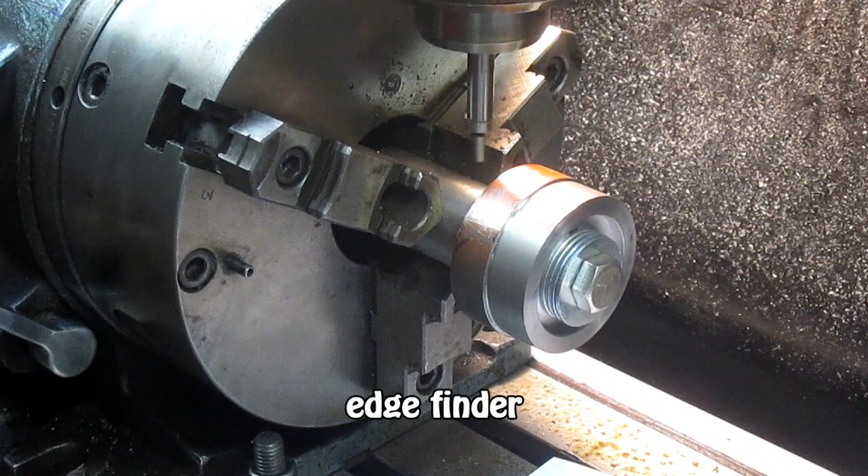Okay, we're going to knock our edge finder off center a little bit. We're going to come down, bring our piece over until we touch, until it kicks. There it is right there.

And then we want to add 100. So let's kick that, and then we're going to add 100. Okay, and that should take us dead center right to that line.

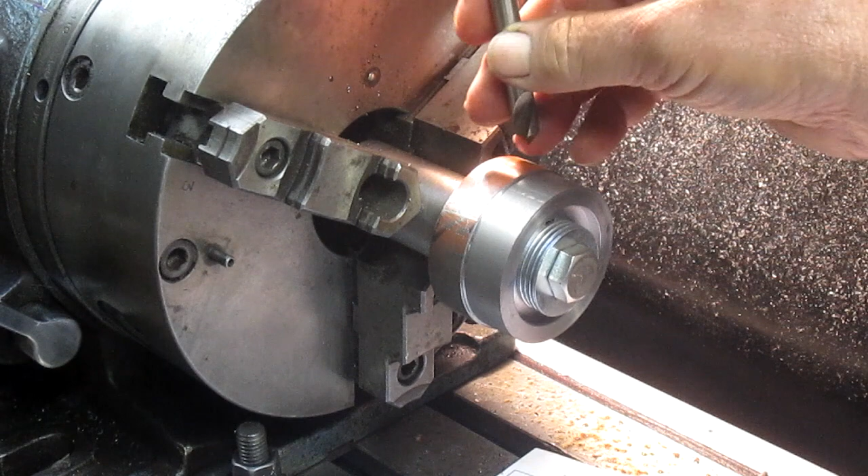How about that? That should give us something. Well, you can't see it, can you? Ha! Okay, let's back up a little bit. There it is. So we're just using a center drill, and all we're doing is checking to see where our line is. And it looks to me like we're dead center.

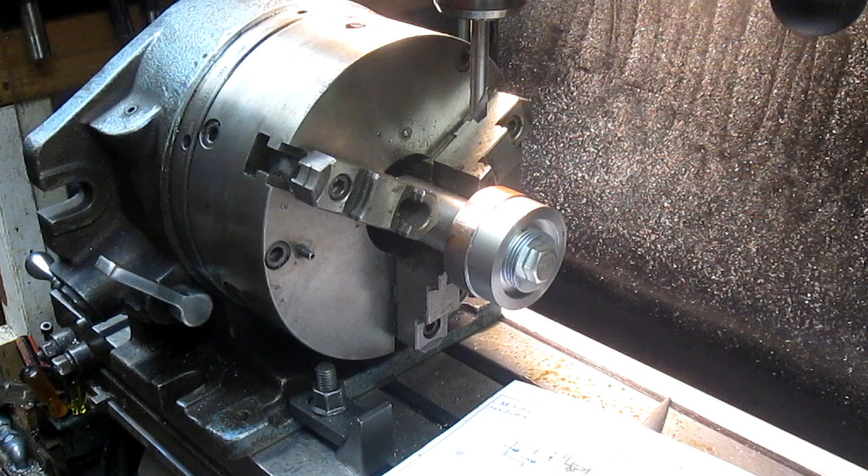Okay, so now we're dead center on this line, so we want to zero that. So now we're going to come one hundred and 1 thousandths. Or is that 1 inch and 100 thousandths? I always forget to do the decimal. So there's 1 inch, 100 thousandths.

And that seems to be landing just about where we want it. Now, are we back in place here? No, we're not. Just want it to go to 330. 330, there it is. Yep, that's hitting just about right. I think we're going to be good. Let me get a little center going.

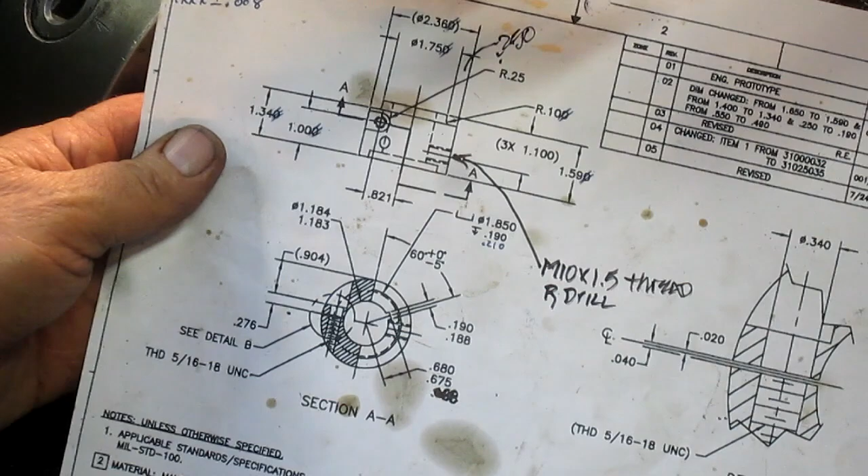Okay, it's about an hour later and we got all 3 holes drilled in 7 pieces. Now we're going to go to the next step. Can you see that? Yeah, you can. And basically we're going to drill this hole in the side of this piece and later on come in and slice it. So it looks to me like we've got a 1/4 inch radius, yes, which makes it a 1/2 inch bit, which, no problem. I think that's probably the next step we want to do.

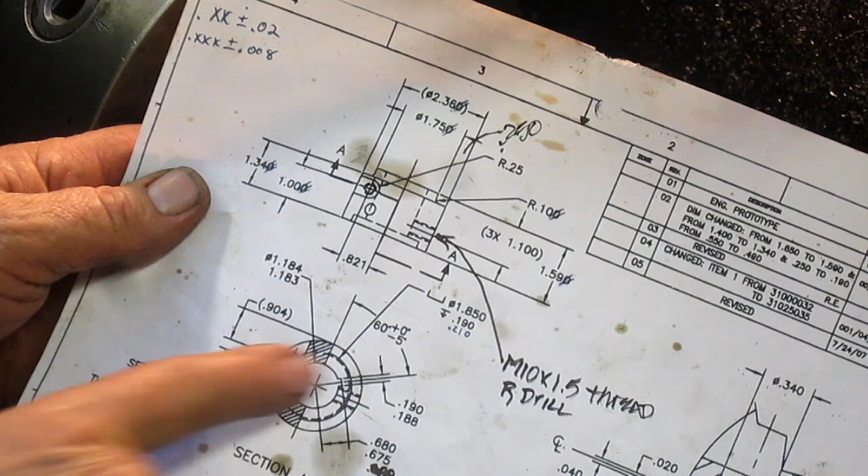A 1/2 inch bit coming in a certain distance. And it looks like we want to have our key at that 60-degree angle. So we're going to just move things around and see what we can come up with.

So first thing we want to go do is, let's go to 0. There's 0. And then we want to rotate 60 degrees, and that should bring our key up. Let's take that bolt off and make sure that our key is in the right place. Yes, it is. Okay.

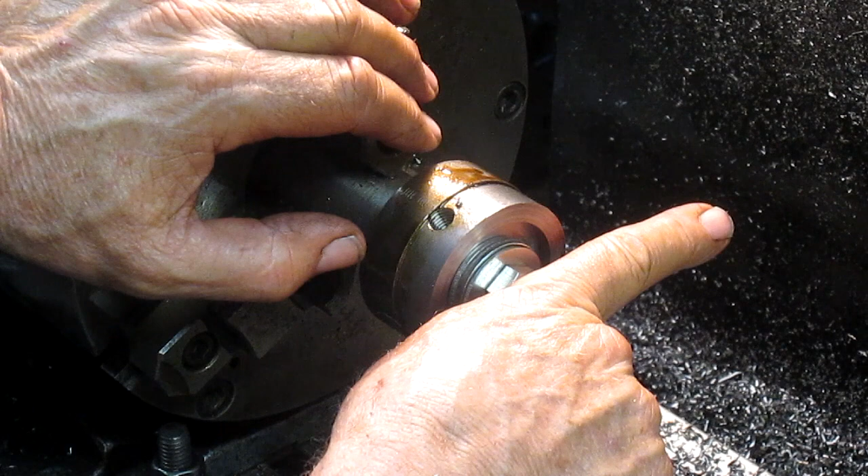All right, so now our key is at the 60-degree level, which places this hole at 90. Let's see, and that means that we come back to this side. I think what we should do is come back to 0 here. 4, 3, 2, 1, 0. Okay, that's 0 to there, to that mark. So,

And of course, whoever did this wasn't really thinking about the machinist. No. He went and measured from this side. So, we're going to come 1 inch in from this edge here. So let's get our edge finder going.

Come on out, drop it down, come back in till we're centered. Almost. Until we kick, there, kicked. Okay, that's 0. We're going to add 100 to that.

Now from the edge, here, let me spin you around. You can help me here, because it's a bit confusing, because, you know, engineers, they've never even run a machine. They have no idea what it takes to run a machine.

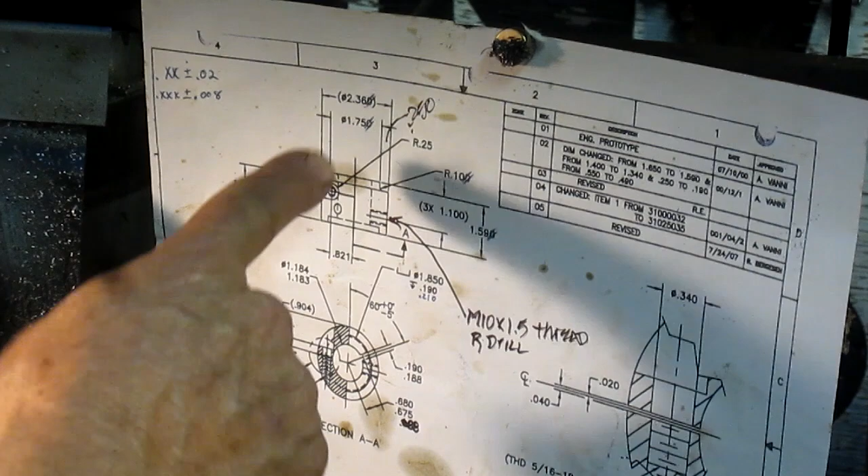Where are we measuring from? From center line. Okay, so 821 thousandths out from center. Okay, so 821.

Okay, 904 thousandths from the very top. And I'm thinking, let's take this to dead center, or to 0. And let's take this to 0. Yes.

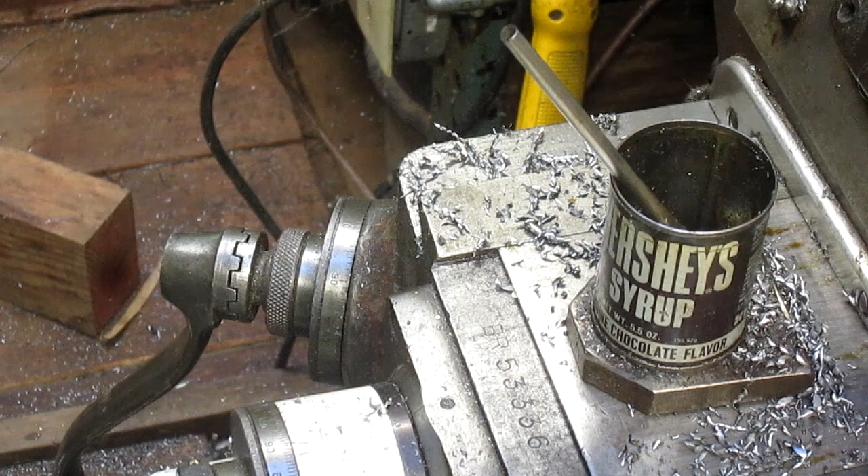I think that's right. You know, I'm not real sure of this, so I think what I want to do is get one of the rejects, and we're going to put a reject in and run it just in case.

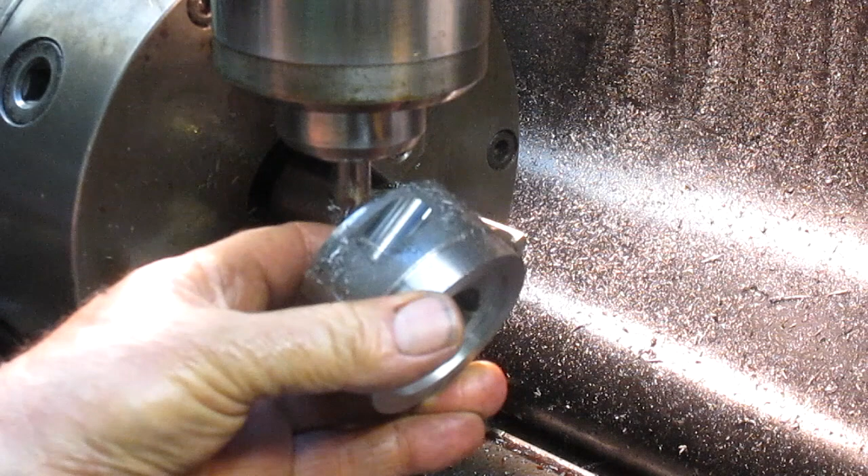All right. I don't know, that looks pretty much like the drawing. I think that's pretty much going to give us what we want.

Well, the thing I want to do first is I still have to take this top surface off. And if I leave this gap here, we're going to have some skipping, and it may not be a really nice finish. So I'm going to throw this on the lathe right now and see what the finish comes out like. Let's go over to the lathe.

And remember, this is a scrap piece, so we don't care. But what we do care about is bringing this down to the size and to see if there's any kind of shadows that come out of that. And I think what I want to do is get myself a

high-speed bit, because they seem to be a little more gentle. All right, let's give it a try. I've got a radius bit in there just to get a nice clean edge. So let's give it a try and see what we got.

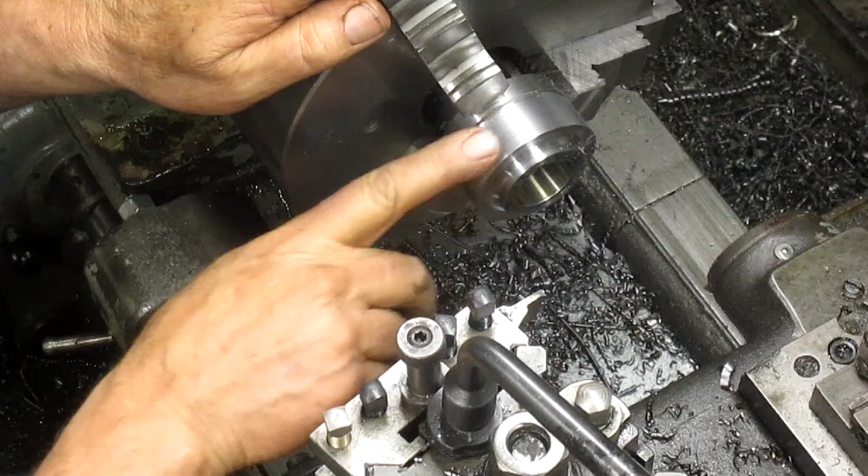Looks pretty good. I'm going to try, let's try an insert bit just for fun.

A little bit of a shadow there with this bit, but nothing really bad. All right, I think we'll go ahead and cut the slot, get everything all cut.

Then at the very end, take the mandrel out of the dividing head and bring it over here and put it in the four-jaw, square it up real good, put our pieces back on, and do a final finish on the end. And that I think will get us where we want to go. I don't really like the surface here, but I think we can dink around until we find a surface.

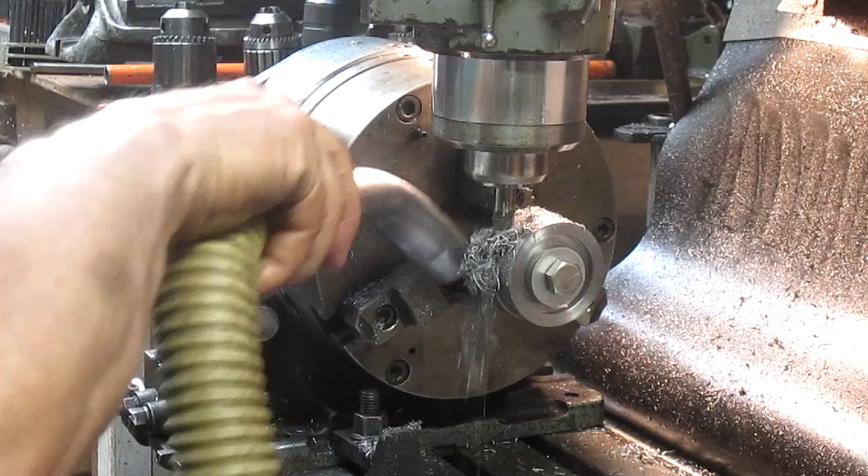Now what I want to do is take this up and make sure that my collet is tight. Yes, it is. Good. Now we can just bring it back down, and we're right there in place where we want to be.

Number 2. Nice. And we'll come back later and drill the hole. Well, actually, that was number 3.